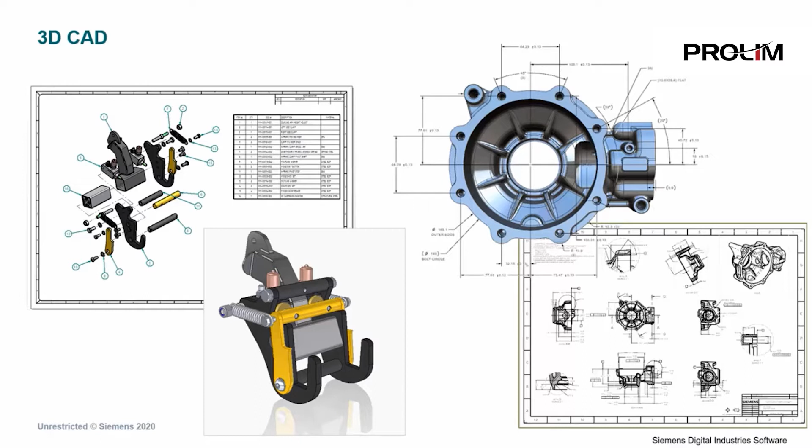The design process then evolved so that the 3D model could be quickly converted into 2D views, capturing a lot of the necessary manufacturing information with just a little bit of effort from the designers, thus improving the design process and workflow greatly. But this process still had some redundancies.

These redundancies can lead to several issues. Probably the biggest, in my opinion, is the prolonged development cycle. Creation of the 2D drafting detail usually takes more time than creating a 3D model itself. When you add up this time it takes to develop the model, drawings, and other variables such as opening, searching, editing, and verifying this redundant information, this greatly extends the time it takes to get the product out the door.

Secondly, the manufacturing drawings can sometimes be difficult to read. Interpretation errors are also a very big problem and can lead to some costly mistakes and increased manufacturing rework time. These problems often result in decreased productivity and quality.

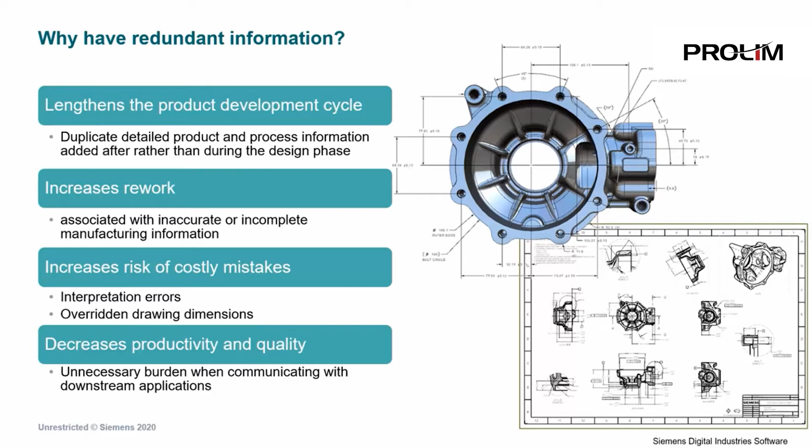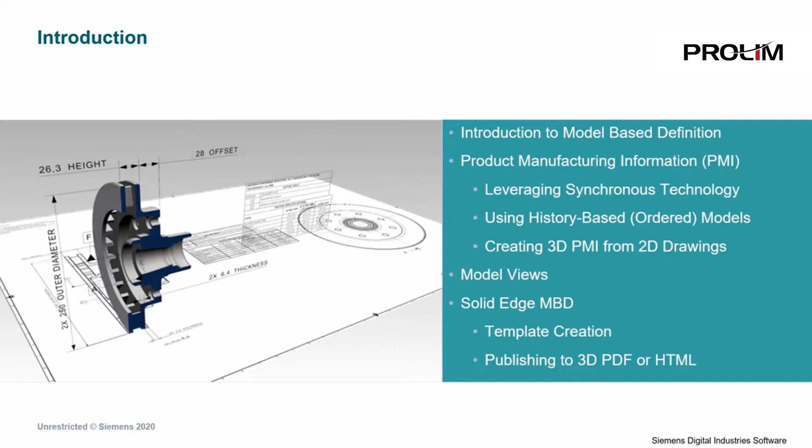We're going to look at leveraging synchronous technology, using some history-based or ordered models, creating 3D PMIs from 2D drawings, and how to disseminate this vital information in a more effective way, using Solid Edge model-based definition best practices. These improvements will ensure that all members of the team have easy access to the vital information required to get the job done.

One of the best ways to eliminate some of this redundant engineering information is to capture and retain it through the use of model-based definition. This allows many sectors of the team to access and share geometric dimensioning and tolerancing, materials, and assembly level BOMs. This can reduce the need for 2D drawings by capturing crucial information directly in the 3D model.

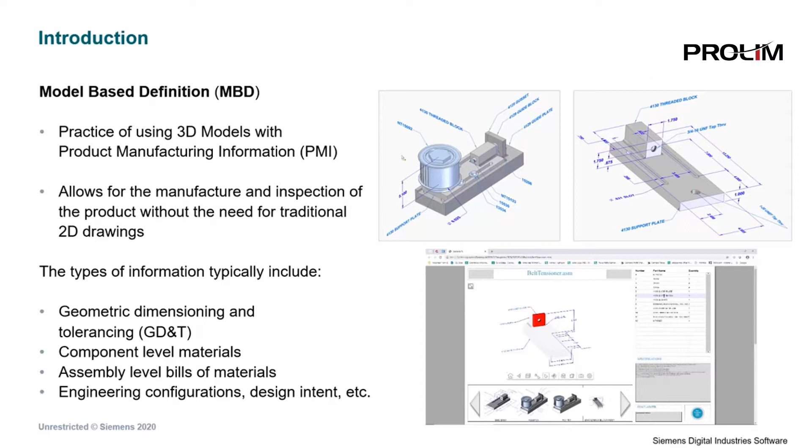Now let's take a quick look at the PMI, or product manufacturing information, if you're not familiar. Solid Edge makes applying PMI dimensions very simple. Here are just a few examples of capturing the important information on both the single component as well as at an assembly level. This information can be shared and read by Solid Edge viewing and manufacturing software to assure that the parts are made to the correct manufacturing specifications the very first time. We also have the ability to export the model and PMI to JT, STEP, CAM Pro, 3D PDF, and HTML formatting.

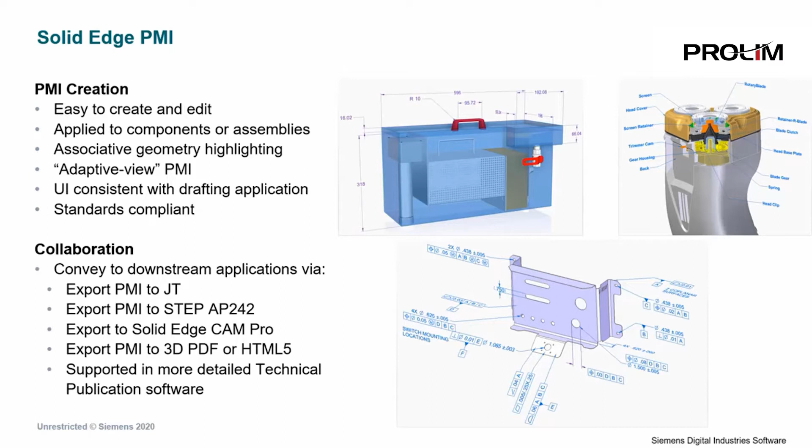Now let's take a look at both PMI and model-based definition together in a few examples. As usual, anytime we edit a dimension in Synchronous, we're modifying the geometry on the fly. Synchronous technology takes advantage of the closed areas of the sketch to create regions that we can then use to drag and create a 3D part.

By dragging the handle, we now have a 3D model. The important element here is that the 2D sketch dimensions are carried over to the 3D part and then become manufacturing dimensions that the shop cares most about.

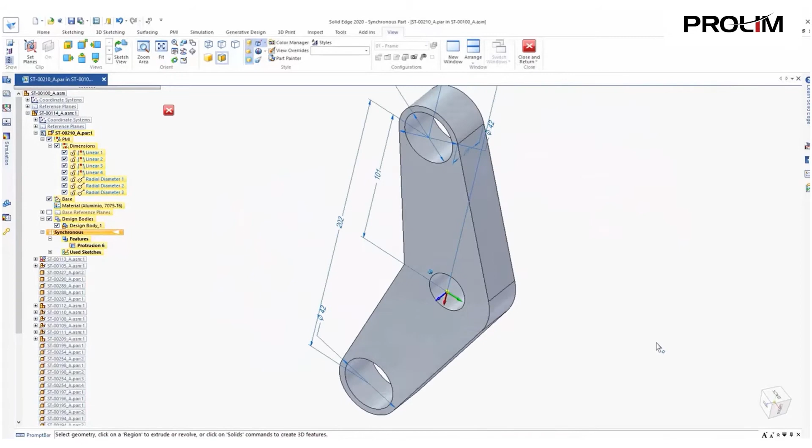Now if you look at the Pathfinder, you will see the PMI node that captures all of this important information. In addition, PMI dimensions have adaptive view, meaning the value changes dynamically as the view is changed, always readable in any orientation.

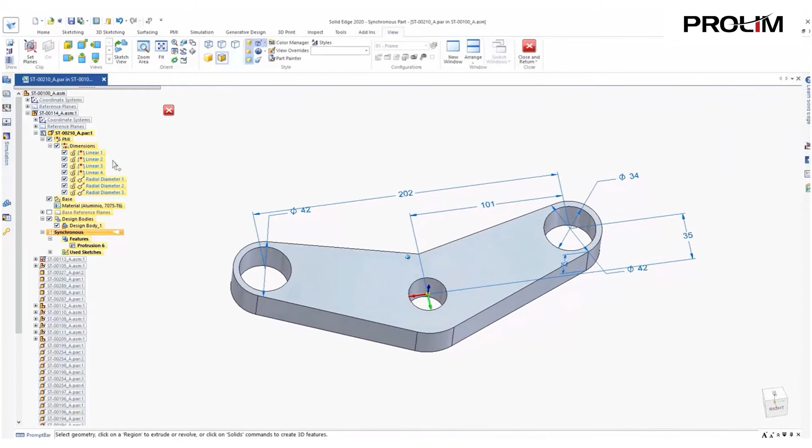Notice that as we change a PMI dimension, Solid Edge maintains the symmetry of the part set forth by the design intent. As we turn off the PMI visibility, we're going to add another sketch directly under the part. Here, by just creating two simple lines, we can raise the middle section of the part.

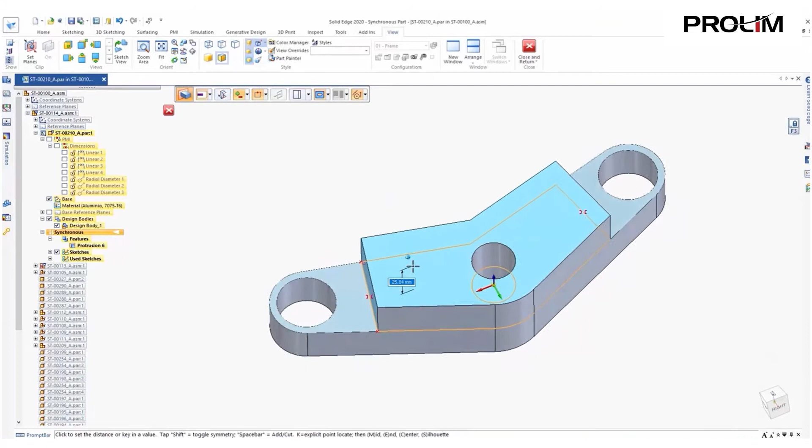Again, notice how Solid Edge automatically adds the PMI dimension to reference the part. Now we're going to project some geometry to create a cutout on the bottom side of the part. Again, see the symmetry being maintained here?

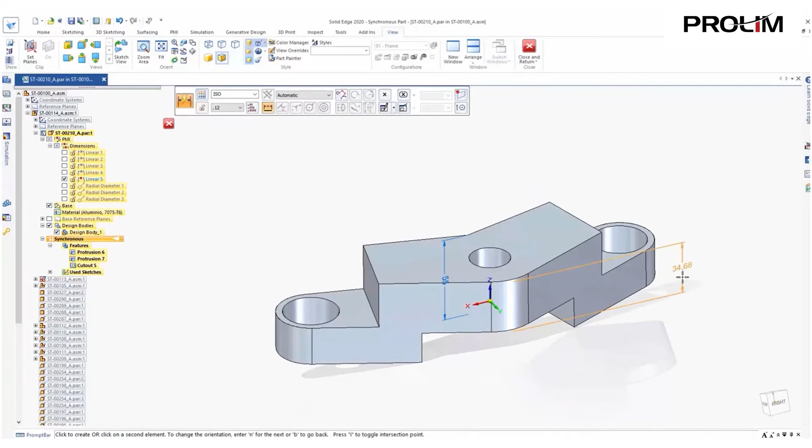Most 3D design softwares require you to carefully plan out your design steps so that they can be edited at a later time. But synchronous technology allows you to have total flexibility of the design and the edits at any time during the design process. Notice again, the PMI dimension is driving the model here and is in total control of the geometry. This is something that sketch dimensions simply don't allow for. The benefit is having the flexible design without having to spend too much time planning for the changes down the road.

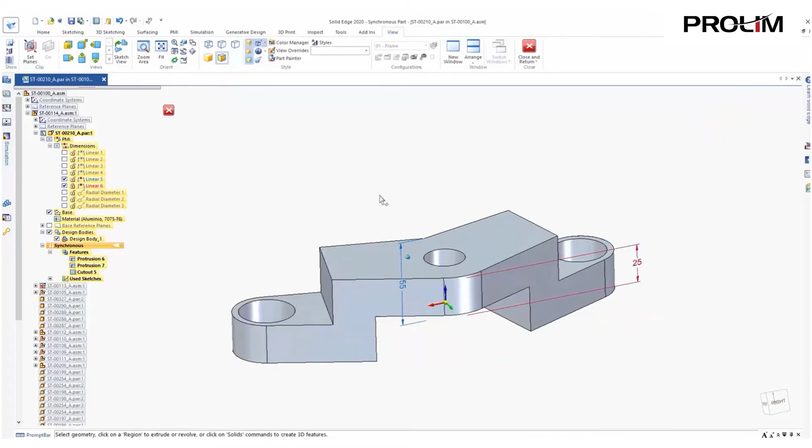As we just saw, synchronous technology has many benefits, including being ready for model-based definition. However, not everyone has adapted to this style of design and modification, and that's okay. Since Solid Edge began, it has always supported history-based or ordered design. This method of design relies mostly on the order of features as they were created, along with the necessary dimensions being encompassed in underlying sketch geometry and typically not present at the 3D model view.

Even though this approach isn't as direct as synchronous technology, Solid Edge provides a way for us to easily transfer the 2D sketch intelligence into 3D PMI information. Let's take a look.

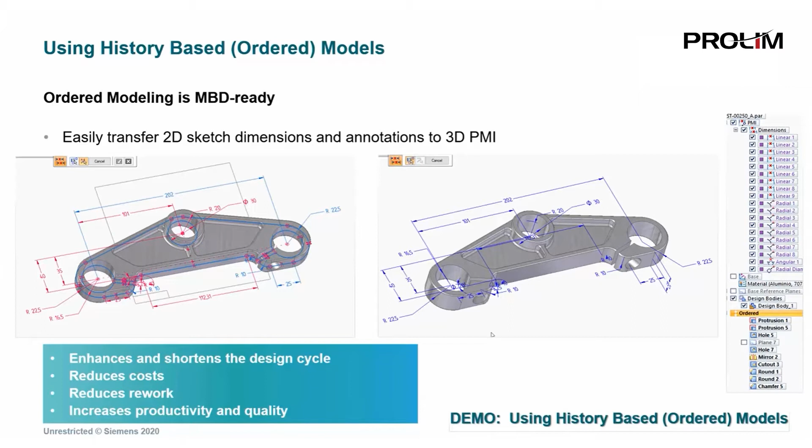Back in our assembly, we have a few parts that were designed using a history-based approach. We'll open it and take a closer look. One of the challenges with working with history-based parts, especially if you didn't create it, is how it was designed in the first place.

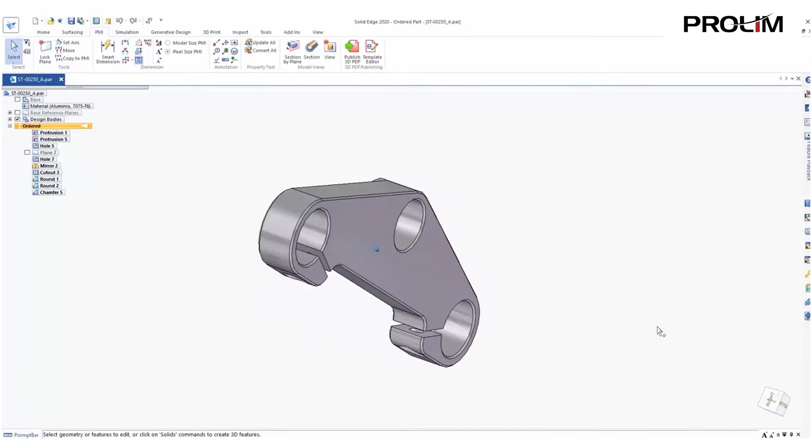Solid Edge has a really cool tool specifically for this. The playback feature allows a user to see the steps taken to design the part and watch the part recompute, one feature at a time. The timing of the playback can also be changed for a better understanding of the building of the part.

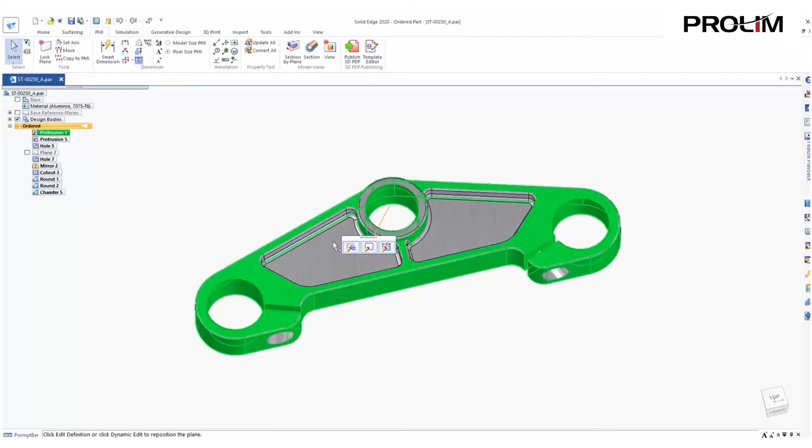Let's take a look at the first feature here a little closer to see the details of the definition. Here we can see the 2D sketch that was used to create the geometry and features associated to this particular feature. We can repeat this process for all of the defined features in the part.

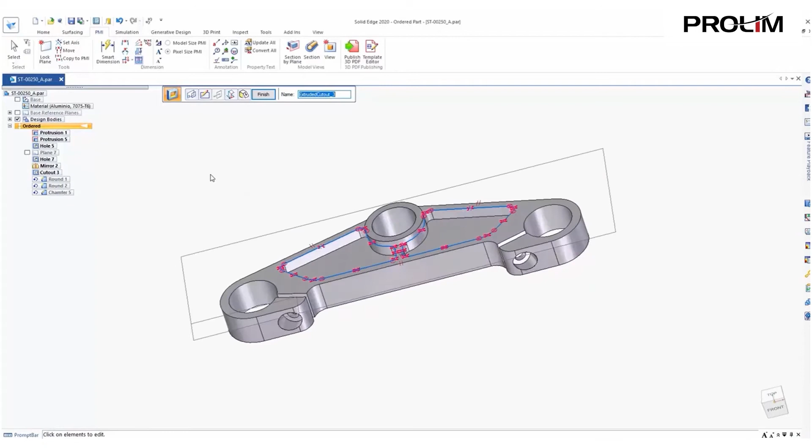But as you can see here, multiple steps are needed to obtain the dimensionings for the entire part. Under the PMI tab, we have the commands at our disposal to manually add this information in, but to save time, we can also use the existing information to copy over to PMI.

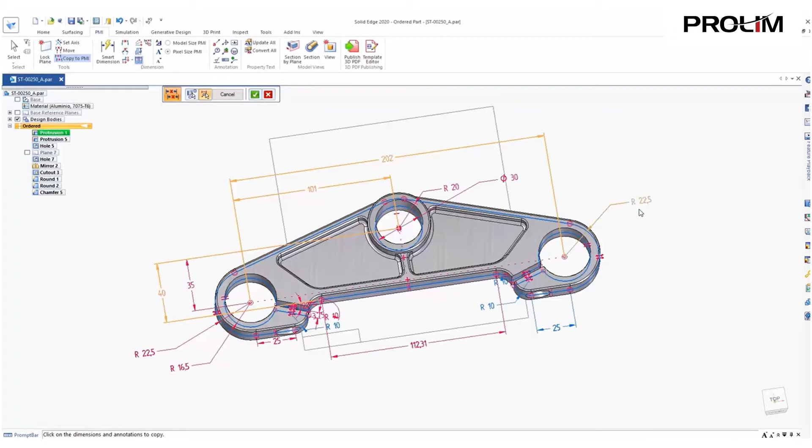In this example, we can select specific dimensions to be brought over as PMI. Simply select the dimensions and Solid Edge will copy them as PMI to be used as model-based definition. As we saw before, those PMI details are captured in the Pathfinder for easy display at any time.

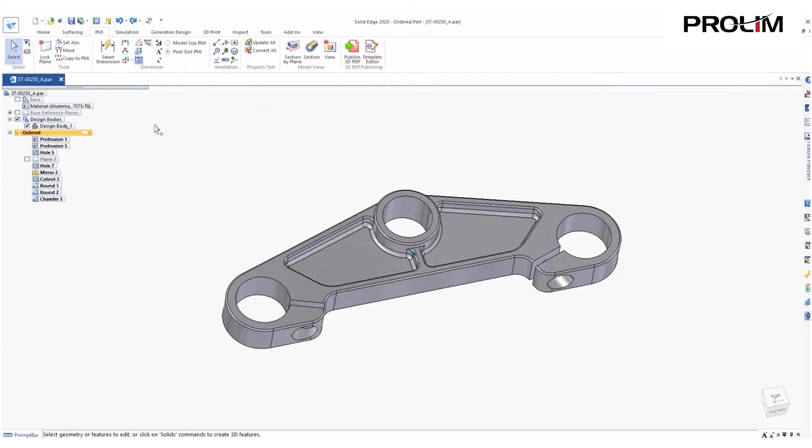Now, as an alternative, we could have selected all of the dimensions at one time to be copied over to speed up the process.

And as you can see, just as in synchronous technology, the adaptive view is set for PMI and always readable on screen, regardless of the orientation of the part.

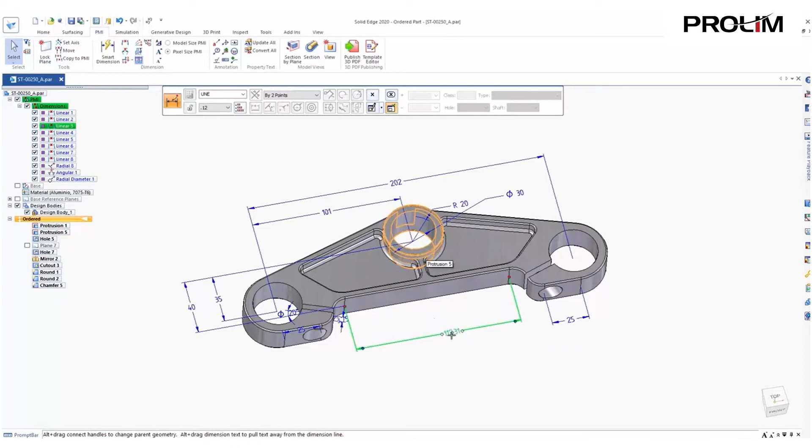Next, we will determine which dimensions are critical for manufacturing purposes and delete the ones we don't need directly from the Pathfinder. Adjusting the PMI dimensions in a more reader-friendly fashion is always easy in Solid Edge, as you can see here.

Now, what about CAD data that wasn't authored inside Solid Edge? Many companies either receive 2D or 3D CAD data from outside of their organization, or have old data developed in another CAD software. The data migration tools within Solid Edge allow users to migrate 3D models along with their associated 2D print files from several different CAD systems, while keeping the interconnectivity between the two. This is an invaluable benefit for companies that still operate using traditional engineering methods of manufacturing documentation.

For those companies that want to incorporate model-based definition into their workflow, Solid Edge provides an easy way to connect the manufacturing info from the 2D drawing directly into the 3D model, which automates the PMI process. Let's check this out in action.

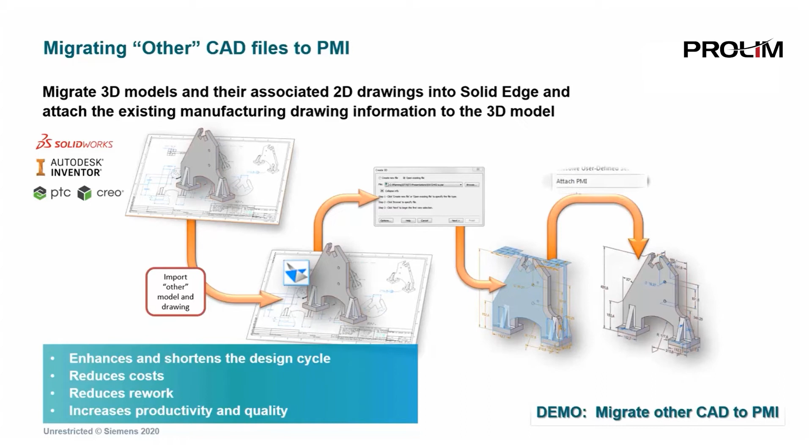In this demonstration, we're going to take the 2D manufacturing information and automate it into its corresponding 3D model as 3D PMI. As you can see, we have the ability to read many different types of CAD data from many other softwares.

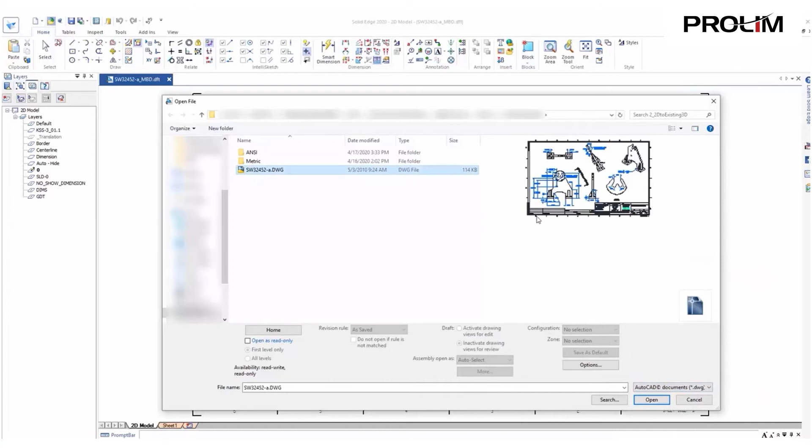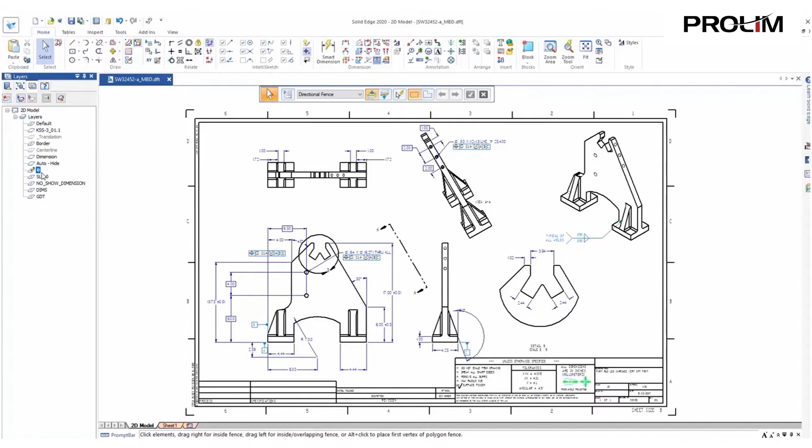First, we'll open up the 2D drawing that has all the manufacturing detail. As part of the migration process, Solid Edge has the capability to easily read and recognize the layering structure that many other CAD systems utilize. We can also have the ability to hide these layers for easy interpretation.

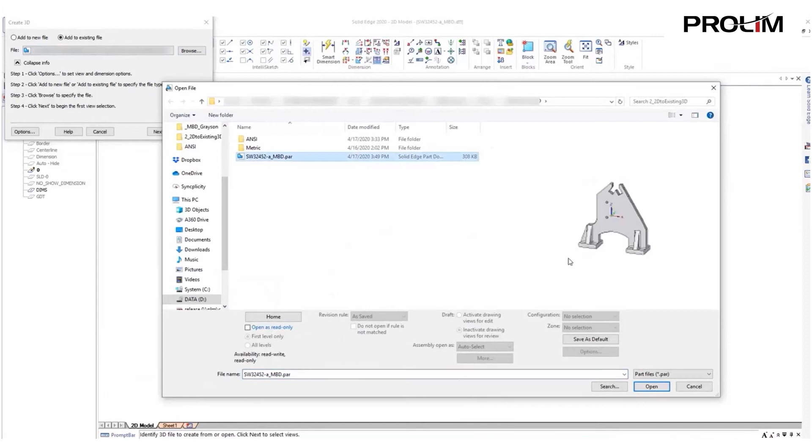With one click, we're able to activate a great tool that will allow us to create a 3D model from scratch, using the information on the drawing, or in this case, connecting it directly to an existing 3D model that we opened up from alternate CAD software. Options for projection angles and which DIMs to use are also available.

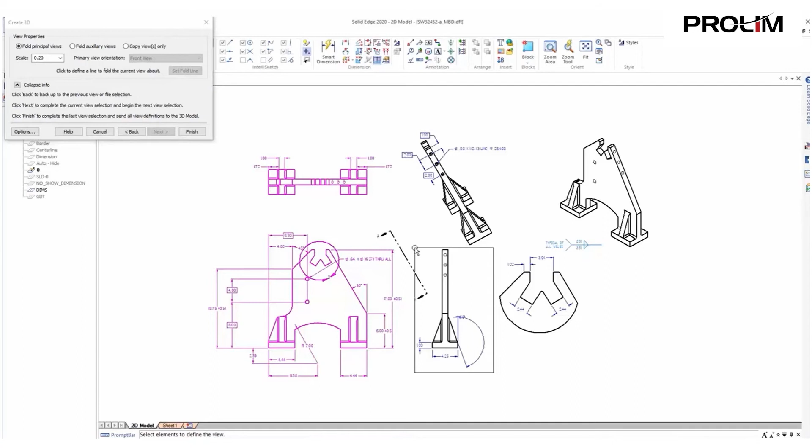As we select the desired views, Solid Edge will automatically copy and paste the selected information into the 3D CAD model. As you can see, as we maneuver to different views, the information is automatically aligned.

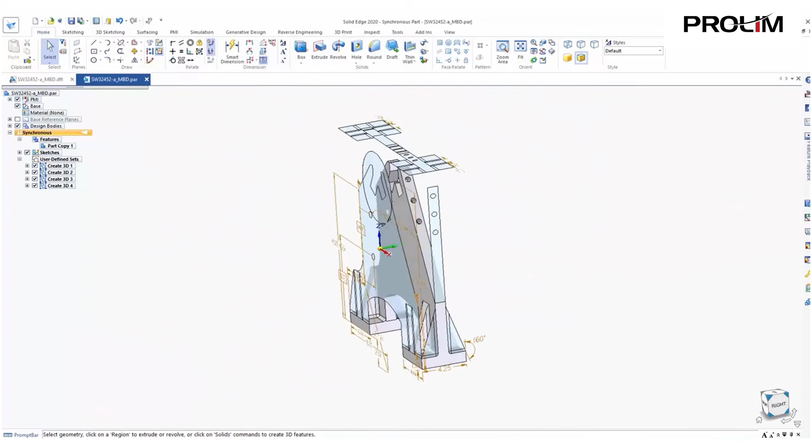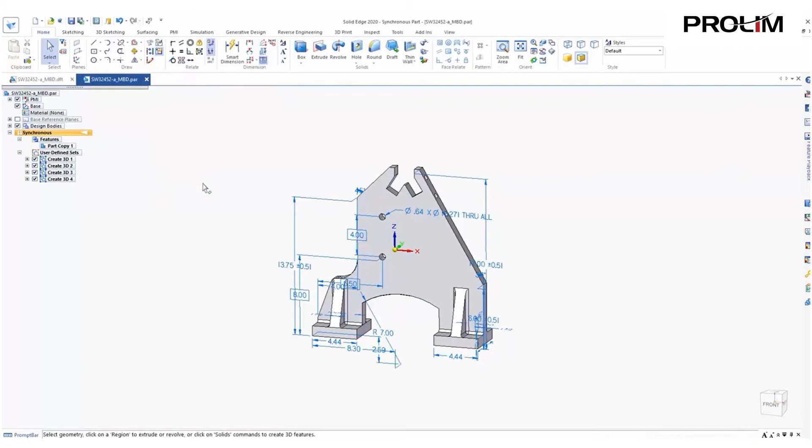Now with one more mouse click, the information is copied from the 2D file into the 3D part, automatically attaching and connecting itself to its corresponding geometry. We now have a completely parametric model that can be driven by PMI dimensions, making this once dumb model from an outside CAD software now intelligent, easy to modify, and ready for model-based definition.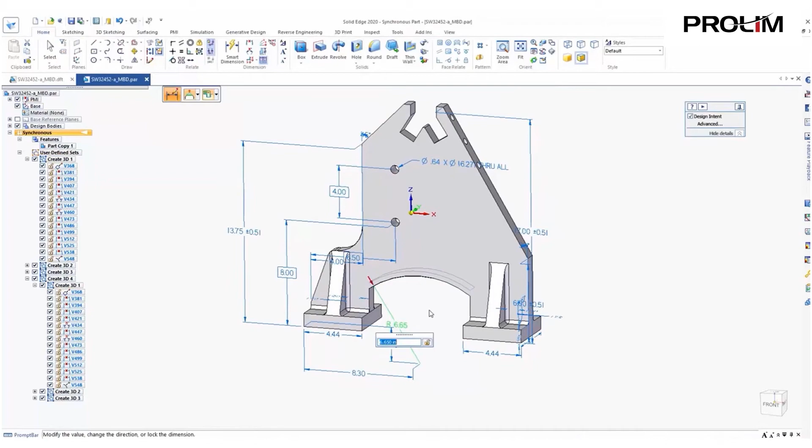Now that we've shown how to gather PMI dimensions and other annotations, how can we break this information down a little further into different views and other focused information? Views can also be considered as advanced display configurations. Not only do the views specify which parts are visible, they also specify which orientation and which PMI and annotations are shown at any given time.

Various model views can be captured and displayed in the Pathfinder, allowing for common tasks such as design reviews to be easily executed.

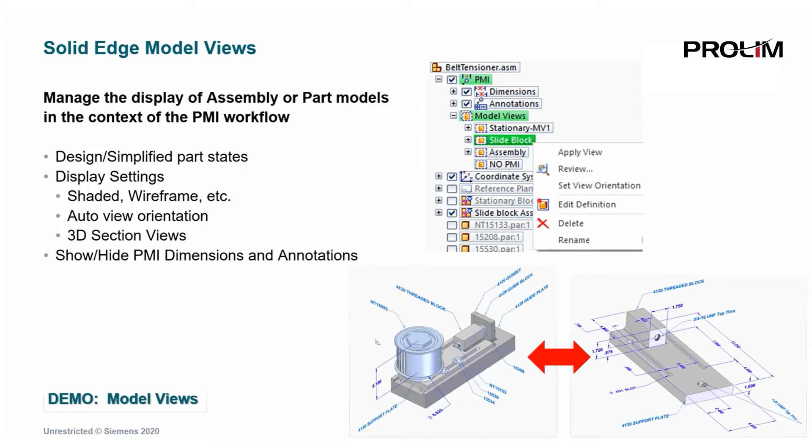In this next quick demonstration, we'll create a model view using various PMI information from an assembly and how we can quickly toggle different displays to review different states of our design process.

Over in the Pathfinder, you can see the model views that have been created so far. Simply clicking on the view gives us access to apply it and see it in its configured state. With each view, the orientation and information dynamically updates.

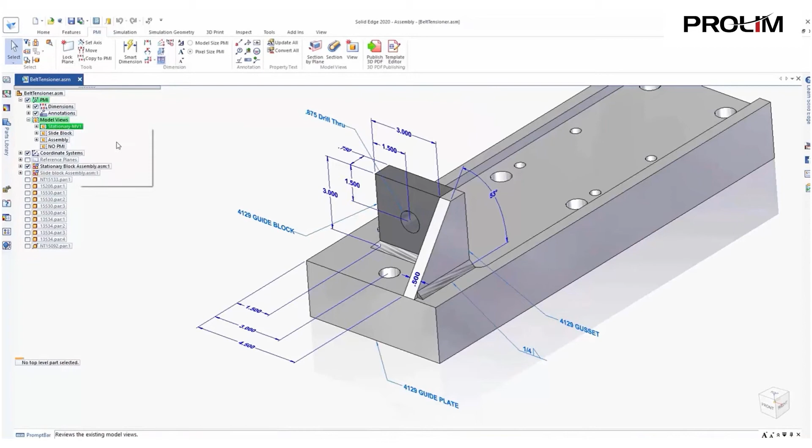Also available is a quick view mode. This allows you to quickly and easily click through the different configurations.

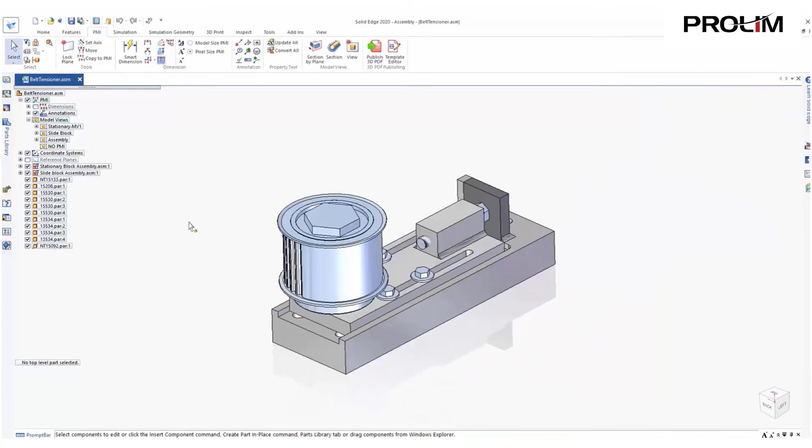Now let's start with a clean slate to see how easy it is to create a new configuration. First, let's only show the components in a smaller subassembly that we want to focus on. Next, we'll orientate the model into a position that we want for a clearer display view.

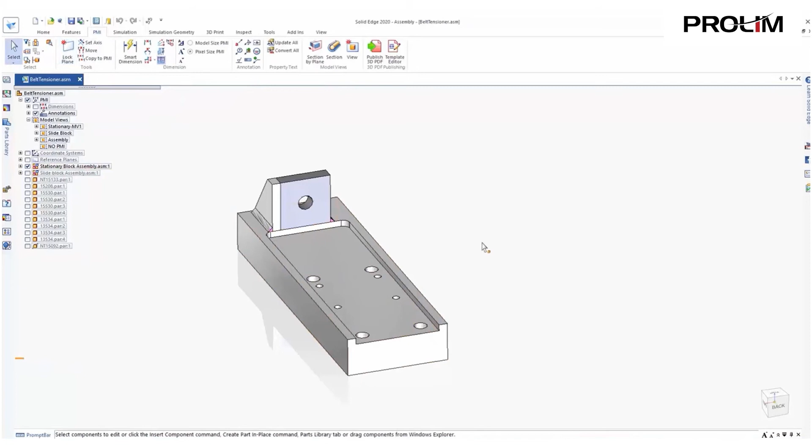Now, let's place a few PMI dimensions that will represent the critical features of this block. As you can see, the same workflow and tools are used here as within the 2D draft environment.

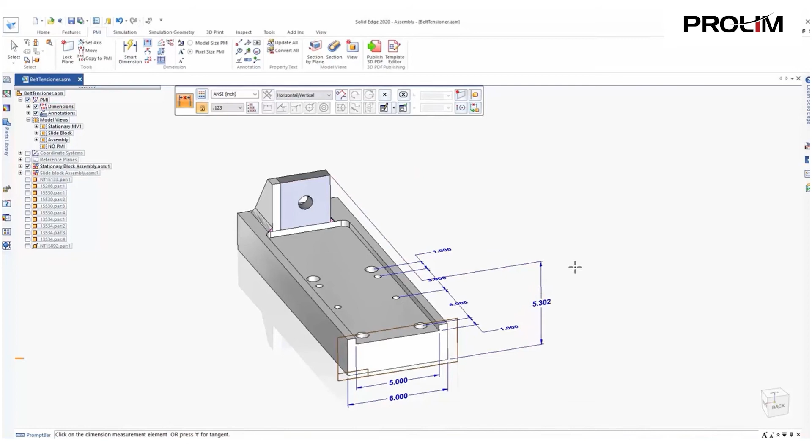While detailing the subassembly, we may want to place a height dimension between two different parts. As this comes in on the front face, maybe we want to relocate the dimension to make a little more sense. This is easy with the Move Dimension selection. There we go.

We can also extract other important model properties to add to the view, such as part names, quantities, and weld callouts.

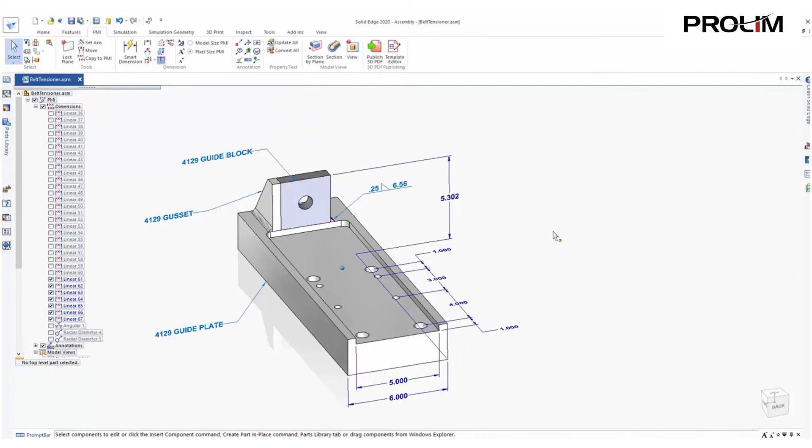Once we finalize the view orientation and PMI dimensions and notes, the final step is to create the view. We simply click the View command, give it a unique name, and specify any additional settings required.

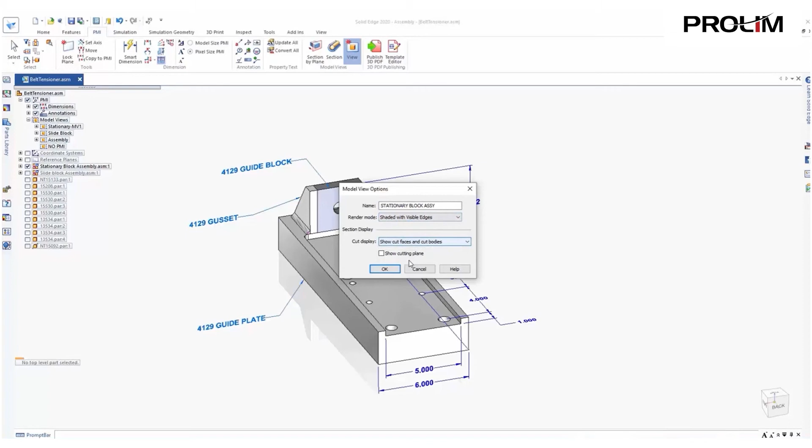Now our new view is added to all the other views created.

Now that we've gone through all the steps in Solid Edge to digitally author the definition of our parts and assemblies using 3D models, how do we now convey this information from engineering to manufacturing, or from manufacturing to supplier, without requiring them to use the same CAD software as we do?

This is where Solid Edge MBD comes in. Solid Edge MBD is a group of tools that allows us to take information we have created in our model views and publish the content to widely accessible and widely used formats such as 3D PDF and HTML. In addition to conveying the Solid Edge data, other user-defined attachments such as Word, Excel, and PDF can be used to create a technical data package.

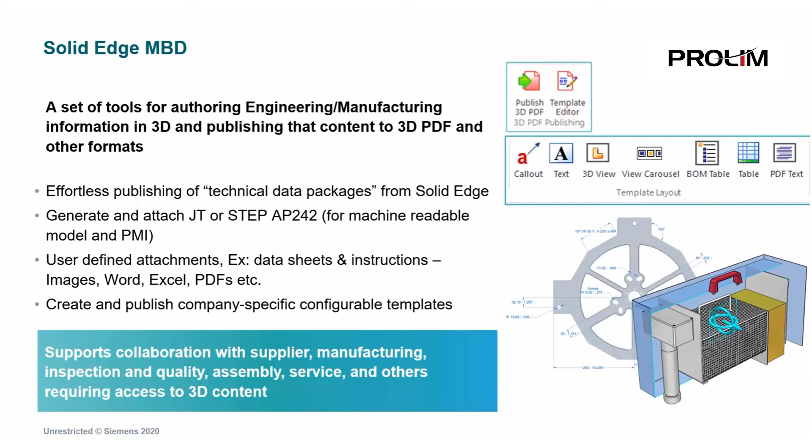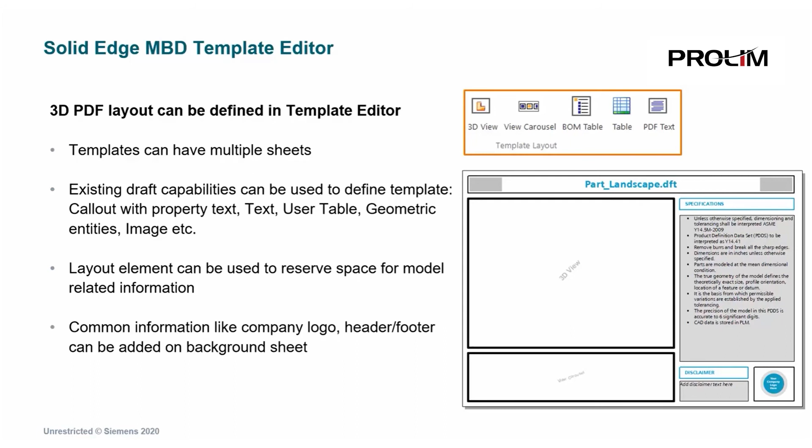One of the great tools that makes sharing this information possible is the Solid Edge MBD template editor. This template editor uses a familiar SE draft environment interface to define a configurable template layout. Templates can include interactive views of the 3D model, a view carousel to easily transition between model views, bill of material tables, and other customer-specific information.

Once the templates are ready for use, publishing the content to 3D PDF or HTML is a breeze. Options when publishing include attachments, generating neutral JT or STEP AP242 files that can be read into various other applications.

This allows for manufacturers to send data downstream to suppliers without sending the proprietary information or forcing the supplier to maintain the same version of matching CAD software to share files and collaborate. Password protocols can also be enabled to keep that special sauce safe.

Within the Solid Edge interface, inside the PMI tab, you'll notice both the template editor and the publishing tool. Selecting the template editor will take you back into the familiar Solid Edge drafting environment. All of the familiar drawing and sheet setup tools are available for easy template creation.

Oftentimes, companies want non-accessible, editable items placed on a background sheet. This option is also available here.

The first thing we're going to drop into our template is the Siemens company logo or image. Just as in a standard drawing template, these images can be inserted and resized to fit the desired area.

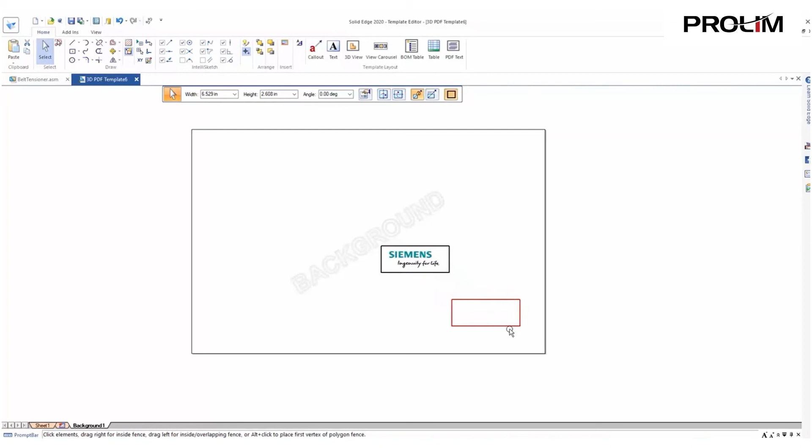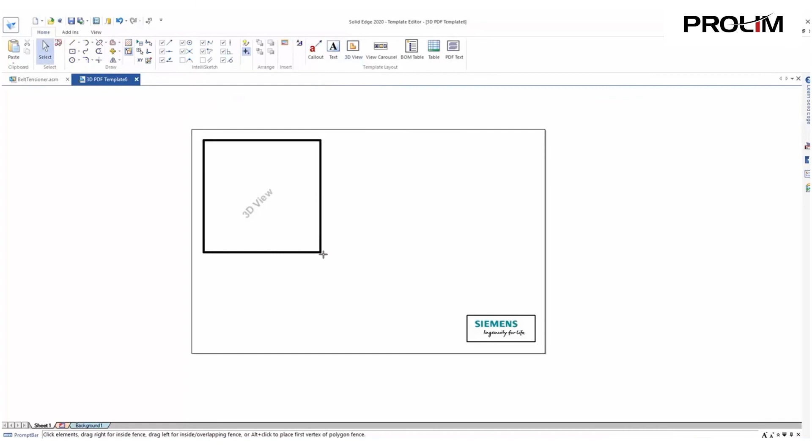As we decide how to format both the viewing area and other relevant information, you'll notice the added tools MBD offers. We'll start by adding the 3D view, which allows direct interaction with the model views. A simple drag of the view allows us to reposition it suitable for our template.

The view carousel, BOM table, and user-defined fields can be placed and edited just as easily.

For purposes of time, let's open up a more detailed template that contains some additional information. You'll notice that options can be created for both assembly as well as part-specific templates.

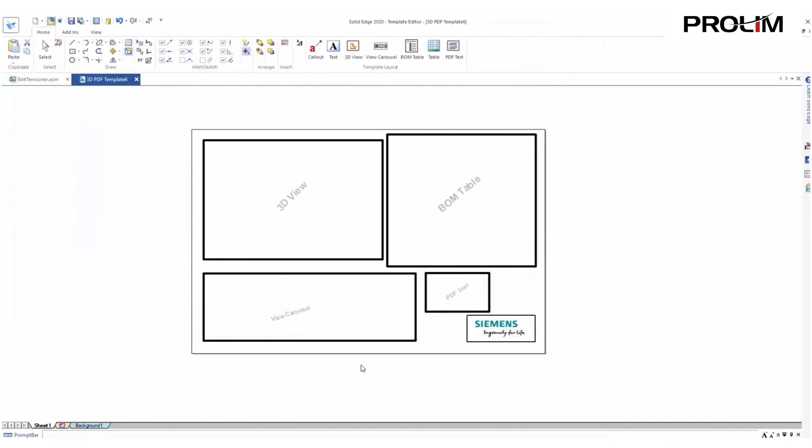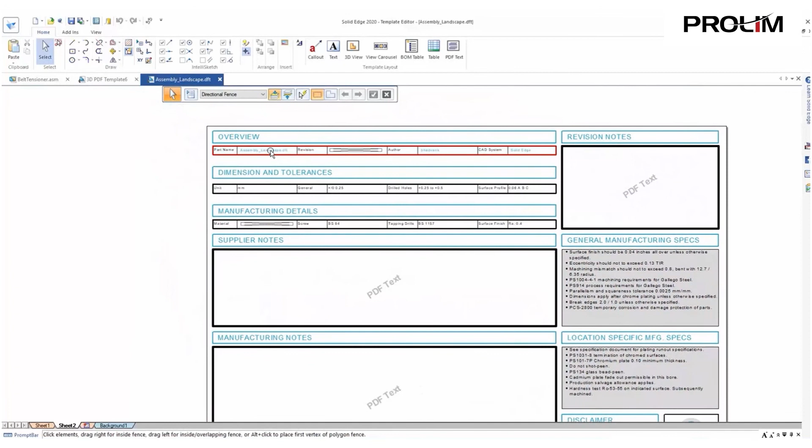This specific template contains multiple pages, along with links to property information. As models get published, their property information, such as part number, materials, surface finish, etc., can automatically be extracted to the 3D PDF.

Like the template editor, the publishing tool is available from within the Solid Edge interface. Simply specify a name and a location of the document, and finish by selecting any available options.

In our particular example, we're going to attach a Word document along with a PDF to include within the data package. From there, select a Publish option and your 3D PDF is on its way.

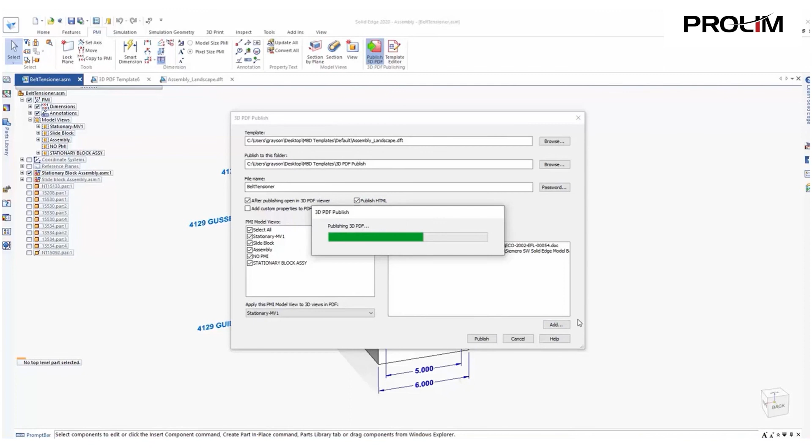Now as we navigate the published 3D PDF, a single click on a model view within the carousel makes available all of the information contained in that specific view.

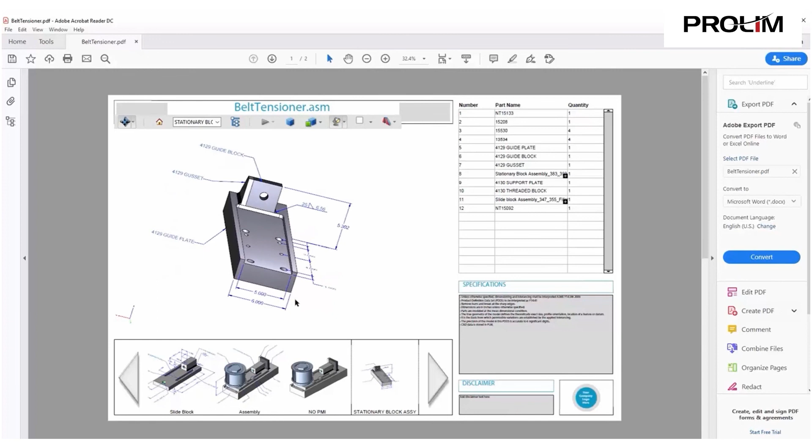Notice that the consumers can rotate, pan, and zoom within the window interactively. Also notice that parts selected within the BOM table automatically highlight within the view.

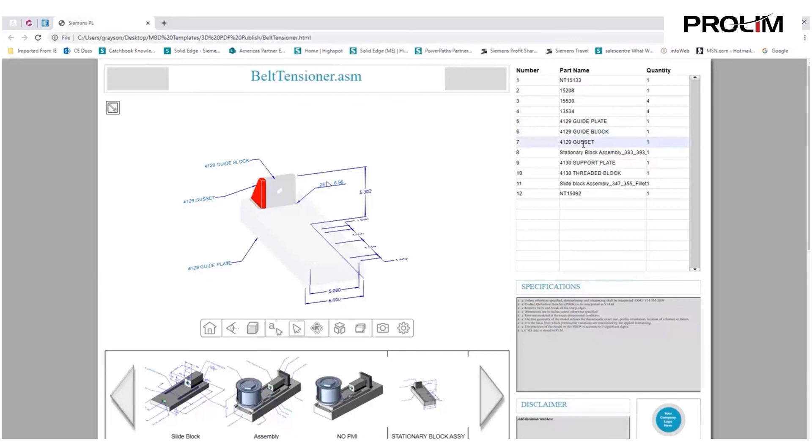Here we are transitioning into the HTML version. As with the 3D PDF, this document is fully interactive. Other options available are interactive sectioning, as well as exploded views for a little closer look at the 3D model.

I hope I was able to convey the many benefits of adopting model-based definition here today, from enhancing and reducing the design cycle by capturing the process information during the design phase as opposed to after, to reducing cost and rework, increasing productivity and quality by documenting the information once in a single source, the 3D model, and being able to use it everywhere else, within and outside of the organization.